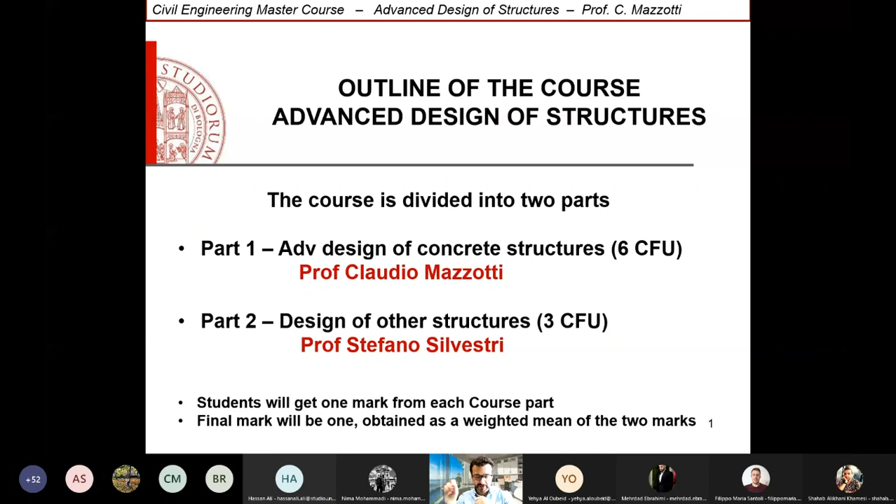As for a brief outline of the program, which can also be found on the web pages inside the website of Unibo in my page, this is a really short outline of the fundamental parts we are going to see along the course.

So part 0, something that in my mind you should already know. This is a structural course of a master program, so we cannot start from the really beginning. I have to give some fundamental basic knowledge for granted, okay? So if this is not the case...

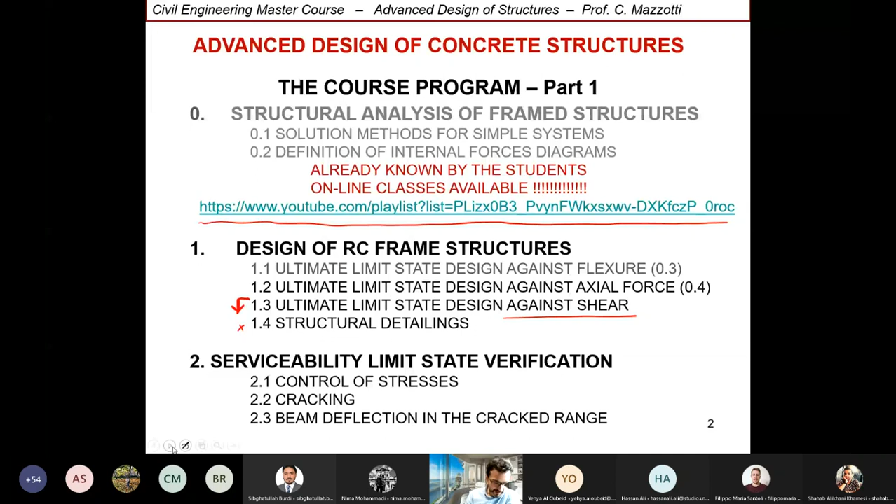Then the second big chapter of the course will be related to serviceability limit states. We will have the opportunity to go in depth on this aspect, and in this framework we will talk about the most important serviceability limitations: the control of stresses, of cracking, and the deflection of monodimensional elements, beams.

Then we have part 3, the ductility of reinforced concrete members. Ductility is a fundamental aspect of structural engineering, especially every time you deal with seismic engineering. But even in all the other cases, the ductility of our systems is a fundamental issue to be clearly understood in order to properly manage the problem at hand.

So we will talk extensively about ductility of reinforced concrete members at different scales, at different dimensions, in order to have this subject really clear. At least this is the expectation. Then point number 4, plates.

And we will move at that point of the course, we will move from one-dimensional elements, beams, and framed structures, to multidimensional systems, plates and shells.

Chapter number 4 will be devoted to the study of plates, under bending, flexural behavior of plates. Plates are two-dimensional systems in which both dimensions are prevailing against the thickness of the element. So you can have in mind slabs.

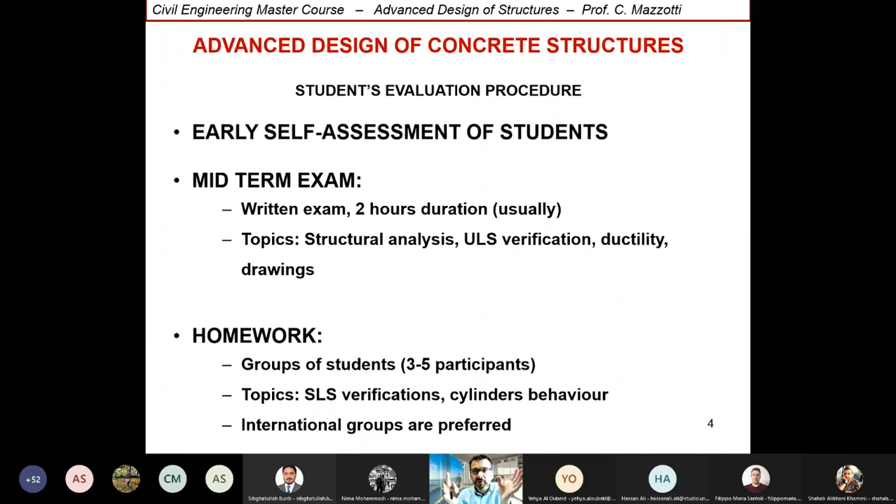Okay, so after the homework, at the end of the course, there will be the final exam. The final will be related only to the remaining part of the course, which was not analyzed previously. So the final exam is a written exam, again online. The duration is the same as before, 2 hours. And the topics of the final will be plates and slabs.

Of course, if you want to do the final, you have to follow the track. So you have to do the midterm and then the final. You cannot do the final without the midterm. You can do the midterm, but if the evaluation of the midterm is not positive, you can still do the final.

The last stage is the oral exam, which is not mandatory, as you can see. I'm going to explain why it is not mandatory later, but really soon. The oral exam will cover all the course. In the oral, the homeworks can be discussed, the most theoretical parts of the course can be asked, can be discussed, but the oral, remember, is open to all the topics covered by my module.

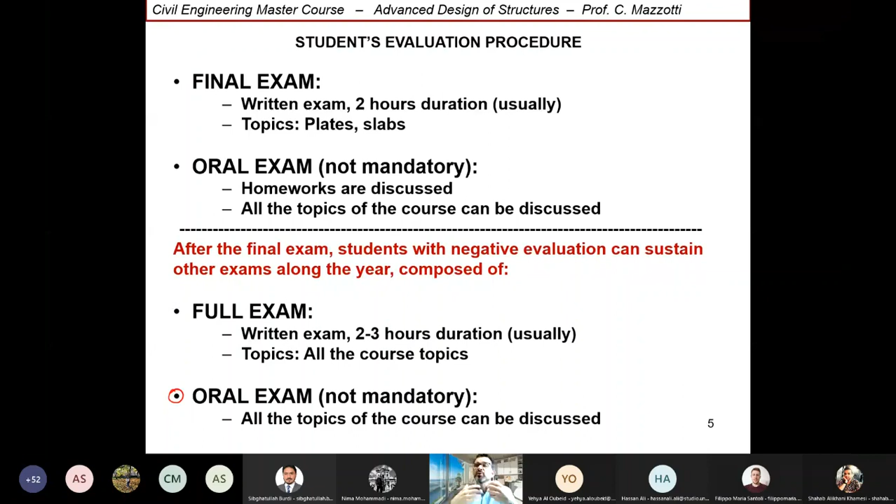So there is quite a complex organization, let's say, but this has been developed along the years in order to support you. It is in your interest, this type of organization.

And now the other phase: how can we evaluate all this part of the course? This is the mechanism of the evaluation of marks. Each activity I've mentioned before along the course, along the semester, allows the student to gain points, okay? And we are going to sum up all the points you are gaining step after step. And all these points will contribute to your final mark.

In particular for the homework: if you follow the main track, the streamline, which is midterm, homework, and final, okay? Every activity has a number of points, and then we will sum up all these points. So you will reach a given threshold.

But if you don't do the midterm and the final, or if you are not positive, and you do only the homework, then when attending the full exam, the homework will be considered only with 50% of the points. Okay, like it is written over here.

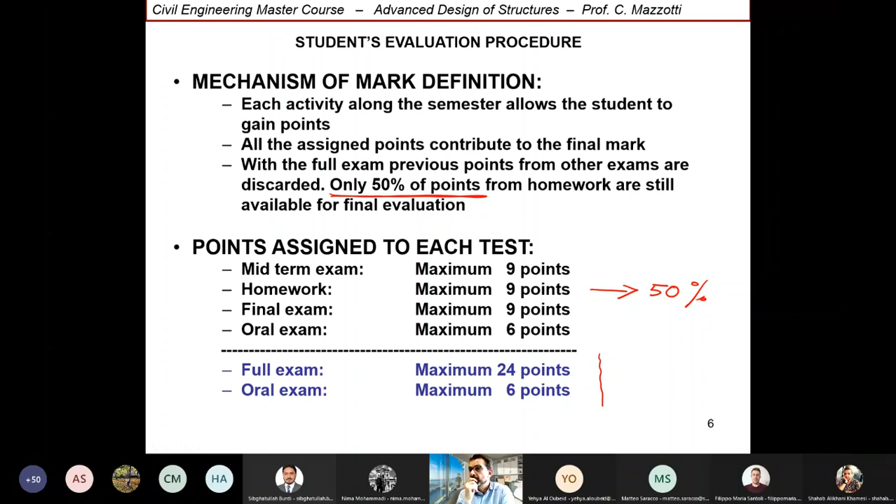Okay. Other questions? Okay, we can move on. The schedule: these are already the dates on which we will do the exams.

Can I ask something? You said your module has 6 credits. Does it mean your score is multiplied by 2, plus the other score, and then divided by 3 for the final? Yes, the final score will be the score with me, the first module, times 0.67, plus the score in the second times 0.33. Thank you, Professor.

You should write down all these days, all these appointments, since they would be hardly moved, especially this year that you are online, so there are not issues about flights, planes, holidays, and so on. I'm giving you this organization today so you can book these activities really in advance.

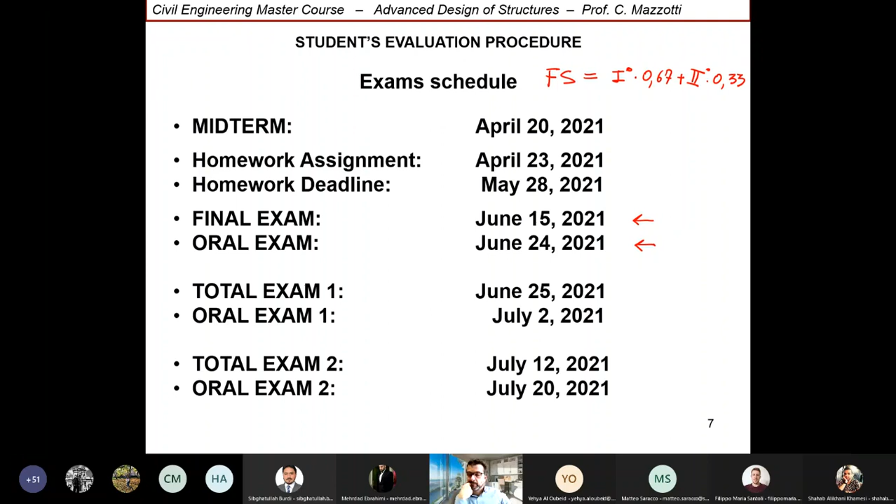Can I ask a question? When you say a positive midterm, how many points do you mean, out of nine? No, if I said positive, I made a mistake, sorry. You have to do the midterm, even if you gain only a few points. Even if you gain really few points, you can do the final. If I told you there's a minimum point requirement, that was a mistake, sorry. You can gain just one or two points and still do the final. If you don't do the midterm, you cannot do the final. But if you hand in the midterm completely empty, if I see an empty paper, it's as if you didn't do it at all.

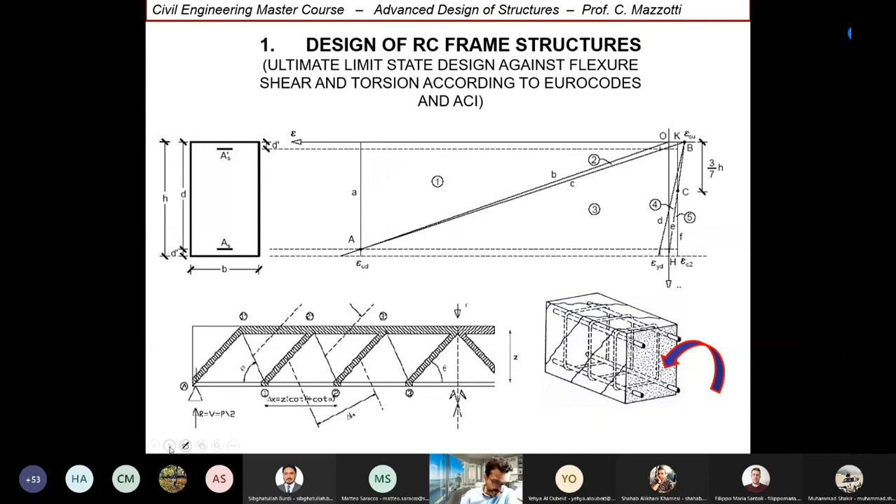Designing reinforced concrete structures to me means, in particular, being able to understand how structural elements work under flexural behavior, axial force, and shear behavior. In this part of the module we will talk extensively about shear, because the behavior against flexure and axial force is already basic knowledge for you.

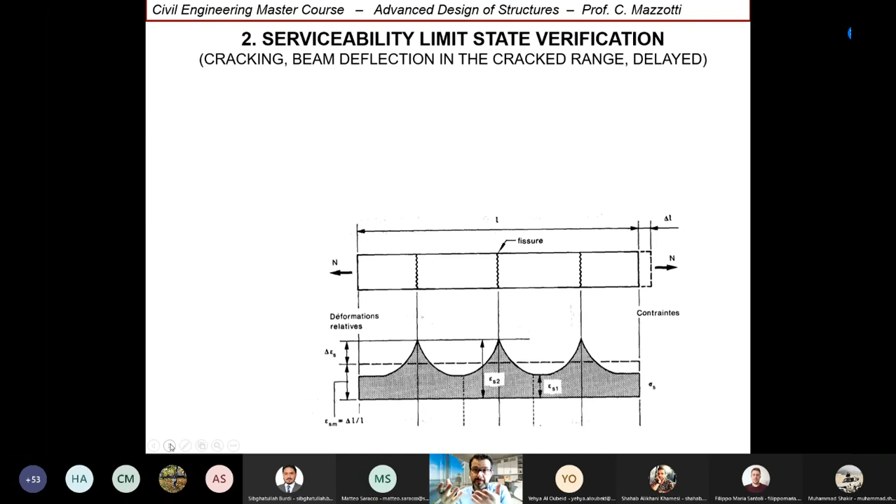We will move to the serviceability limit state. As I told you, serviceability means a condition which is quite common along the service life of a structure. We will talk about cracking, about deflection, and we will investigate the specific behavior of concrete and steel in correspondence of cracking - what happens when cracks occur.

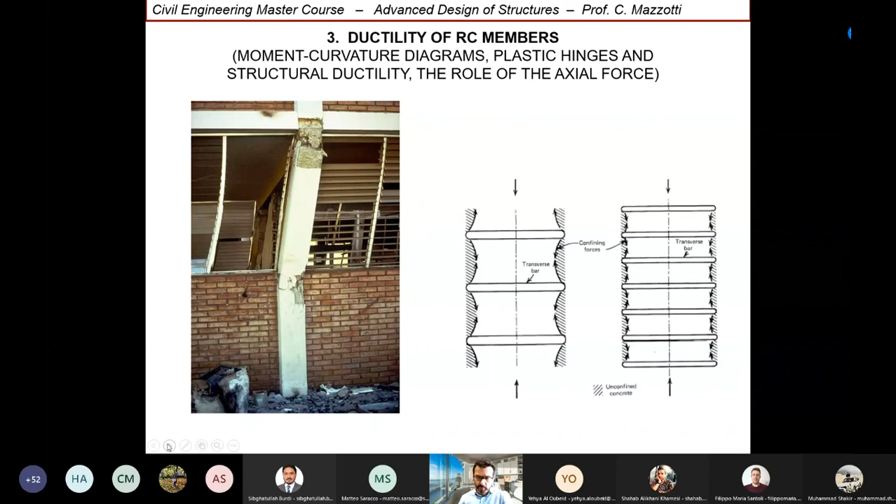And then ductility. Ductility means nonlinear behavior of systems. At least at the bachelor level, we are prone to consider an elastic behavior of our materials and structures, but the real behavior is not linear, especially against exceptional events like earthquakes. Unfortunately, a large number of earthquakes strike every year all around the world. Year after year, the surface of the earth recognized as seismic area is increasing. We have the experience here in Italy: in the last 10 years, approximately 90% of the Italian surface was declared seismic area. So ductility is fundamental every time we look at seismic behavior, nonlinear behavior, strong forces.

Plates, as I told you before, are two-dimensional systems in which the thickness is much smaller than the other two dimensions, the length and the width. This is the main difference with respect to beams, and correspondingly, in order to manage plates we need a different theory with respect to the beam theory that you already studied and know. So we will introduce specific theories about plates and investigate how to understand the distribution of bending moments, shear, and so on, and also how to design reinforced concrete plates.

Cylinders, finally, belong to the category of shells, which means three-dimensional systems. Since cylinders are a really common shape inside infrastructures, we will focus a little bit on the structural behavior of cylinders, how to understand the forces distribution inside cylinders, and how to design the reinforcement inside them.

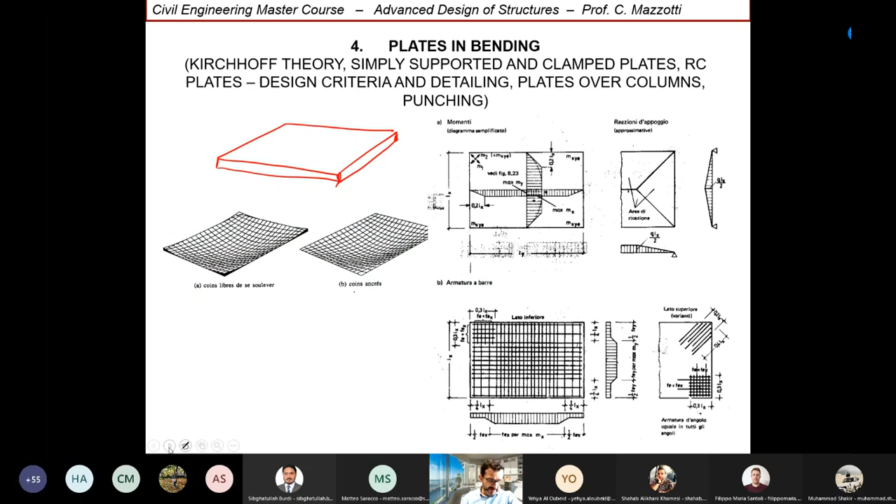The complex tools, the numerical tools, are usually used for the verification approach. We will see that even for complex systems like plates or cylinders, you can use simple methods for a preliminary design. You can use methods available by hand - this is the first step. But then you have to move to the second step, the verification, and for that you need more complex tools, the numerical tools, the finite element methods, for example. You have to apply all the verifications included inside the standards and codes.

These two steps, this track, is fundamental. You have never to mix the verification approach with the designing approach. They are consequential, strongly linked together, but they are not overlapping. It's an error to think that by solving the verification you are designing. Designing is something else.

Most often the most important part of the design are the drawings. The structural details are most often the real important part of everything. So we have to focus on the calculations, but we have also to keep in mind that drawings and structural details are of paramount importance.

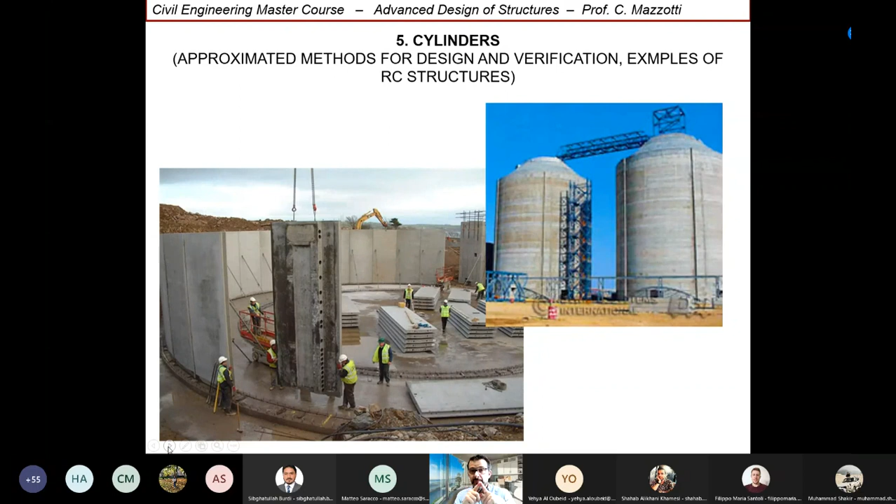As for the codes, our reference will be the Italian code, but since this is an international program, our main reference will be the Eurocode approach and the Eurocodes. There are a number of them, from Eurocode number 0 to Eurocode number 8, focusing on specific issues and aspects of structural engineering. Every time it's needed, we will mention the specific Eurocodes as our references.

In any case, the actual Italian standard was introduced by summarizing most of the aspects described inside the Eurocodes. So the Italian standard is really similar in many aspects to the Eurocodes.

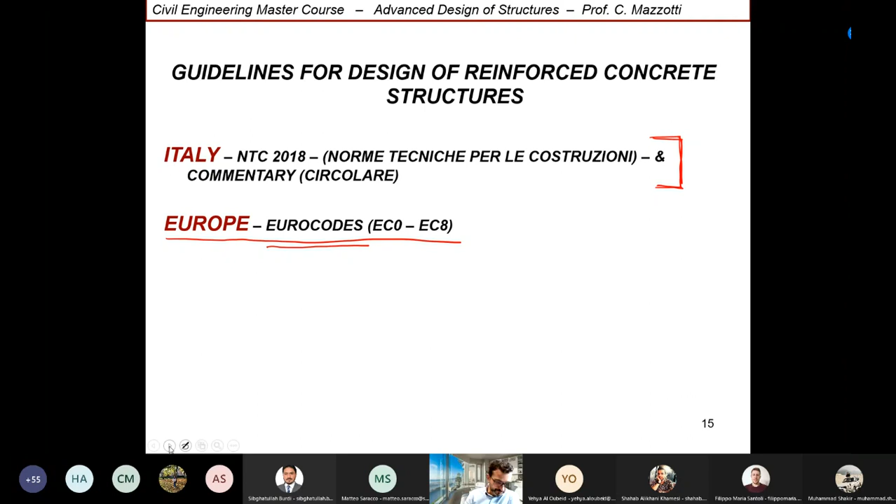This is the structure of the Italian standard, only to say that there are different parts. Even if you don't understand the writing, don't be scared - we don't need to read the sequence of items. We have parts devoted to the actions in order to be able to identify forces, and then we have specific parts describing how to tackle specific technologies.

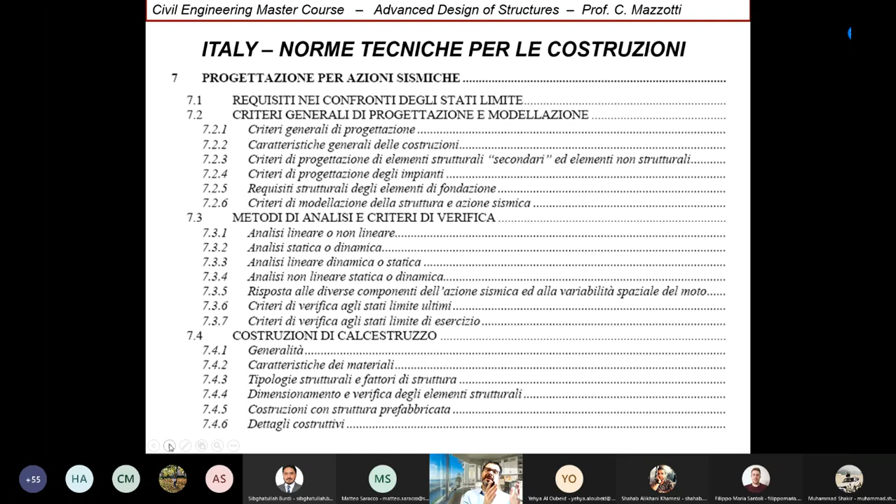Reinforced concrete, in Italian calcestruzzo or cemento armato. And another part, really important, the specific prescriptions for every time you design and work inside a seismic area. This is a common structure of most codes at an international level - chapters for specific technologies and then a chapter for the specific rules for seismic areas.

And then we have another really important chapter, which is quite original worldwide: the chapter specifically devoted to existing structures. At least in Italy, but not only in Italy, most of our built heritage is quite old, and we build really few new buildings, so we have to improve the existing ones. We have to strengthen, retrofit the existing ones, and so we have a dedicated chapter to this type of approach.

How to manage the existing buildings - actually, also inside the Eurocodes, they are working to produce a new Eurocode volume devoted to existing structures. But in Italy, we already have this type of chapter. Not many other foreign standards have this type of chapter.

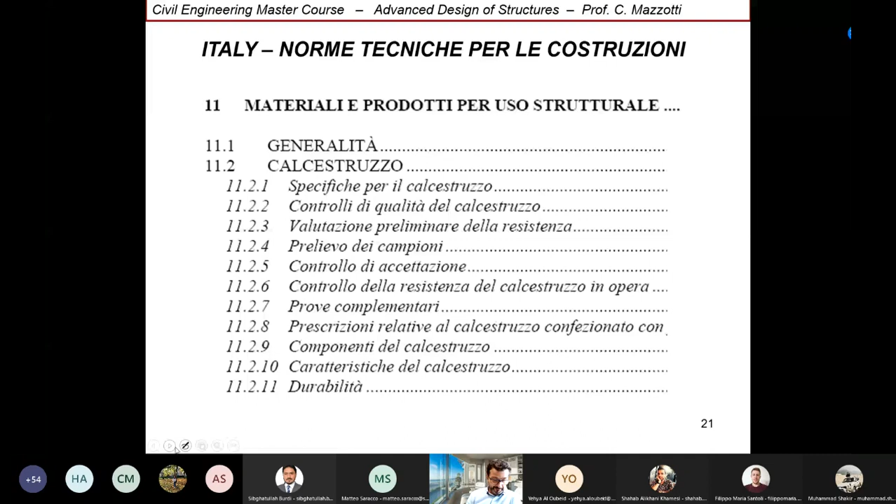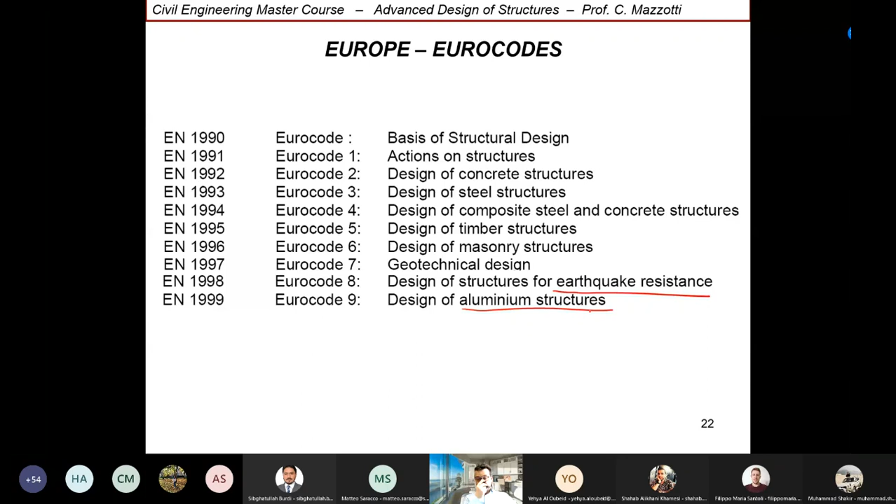This will be the general framework for us when dealing with codes, but we will focus mainly on Eurocode number 2. And this is not the central part of the course - ideas and behaviors are the central part of the course. I'm stressing this a lot, even too much maybe, but because I know that the perspective in other countries is not always the same we share here in Italy. So since we have to work together, the most effective way to do that is to share the same approach.

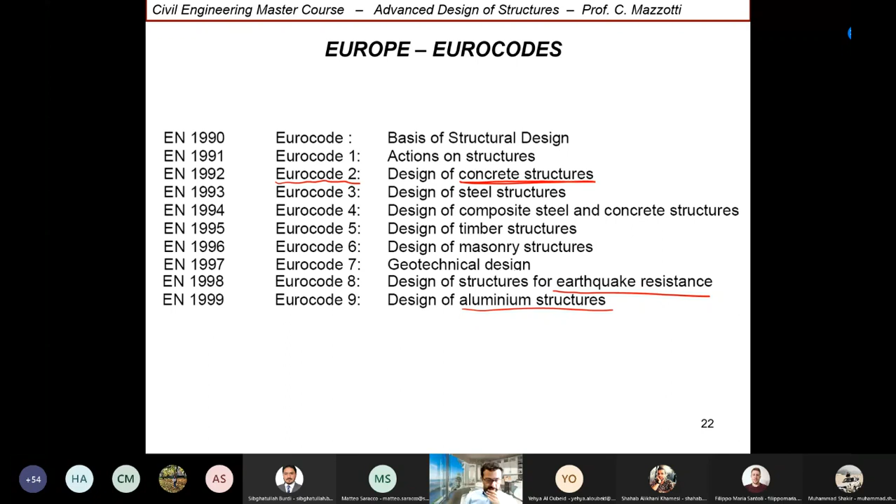That's it. This part can be skipped easily - this is only a more specific focus on Eurocodes.